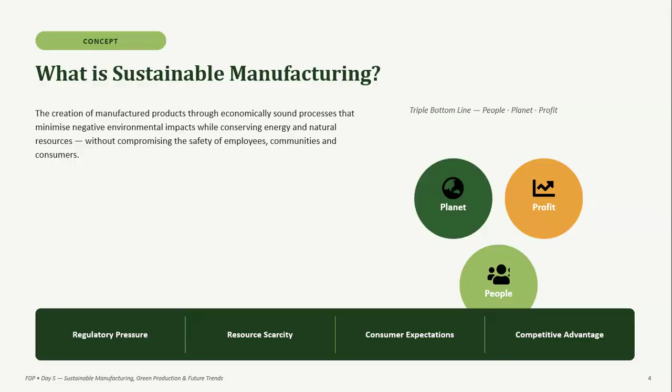Next, following the introduction of sustainable manufacturing, why are sustainability concepts considered to be the most significant important today? Manufacturing contributes significantly to global carbon emissions. However, industries have tremendous opportunities to reduce their environmental footprint. Energy efficient manufacturing processes can reduce energy consumption by nearly 30 to 50%.

Many industries are now adapting environmental sustainability goals initiative and sustainability reporting. Companies increasingly seek engineering graduates with the knowledge of sustainable manufacturing practices. Therefore, sustainability has become an important employability skill.

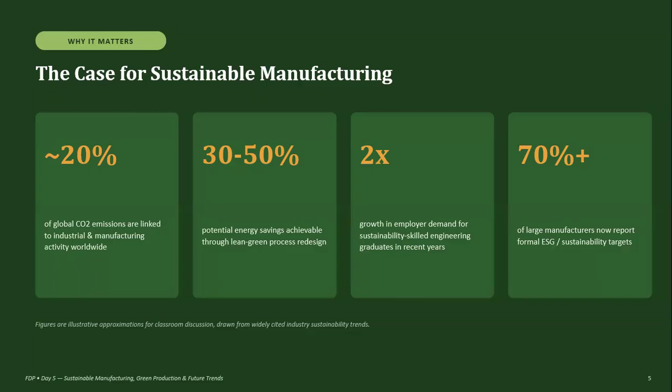The next module, we are going to see the basic introduction about green production. Under green production, we are going to discuss the 6R framework. What is exactly the 6R framework? Now we are going to see one by one: reduce, reuse, recycle, redesign, recover. These are the 6R framework under green production.

Let us discuss the 6R approach under green production. The first one is reduce, which means minimizing the material and energy usage. Reuse involves extending the useful life of products and components. Recycle focuses on recovering valuable materials from waste. Redesign encourages designing products for easier disassembly and improved environmental performance. Recover refers to reclaiming energy or useful materials from waste streams. Finally, remanufacture restores used products to like new condition.

Together, these principles help the industries move forward towards a circular economy. The main concept of the 6R framework is to make use of waste material through recycling without polluting the external environment. From that, we can develop a useful product from the waste material. So this is the main essence of green production: saving the environment.

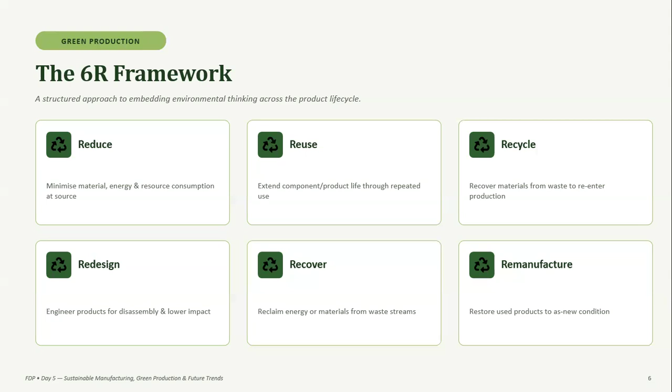What are the various green production tools used in industries? There are several practical tools that support green production. First is lean green manufacturing, which combines waste elimination with environmental sustainability. Renewable energy systems such as solar power reduce dependence on conventional energy fuels. Water conservation techniques include recycling and closed-loop systems. Energy-efficient motors and smart monitoring systems reduce electricity consumption.

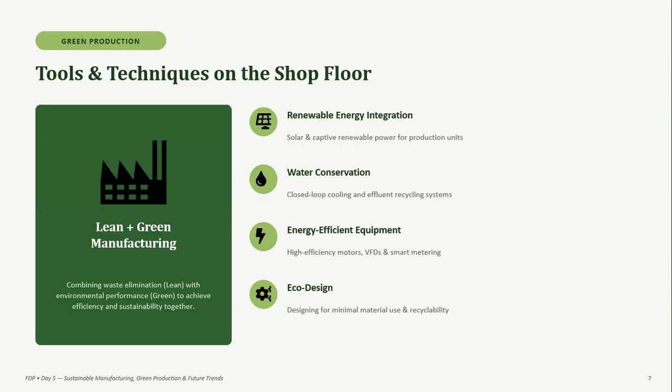Eco-design ensures products use fewer materials and are easy to recycle. These practices improve productivity while reducing environmental impact. So these are the various tools and techniques adapted under green production.

Future trends in manufacturing. Manufacturing has evolved significantly day by day. Let us quickly go through the various industry revolutions, already discussed on day one of the faculty development program. The first industry revolution introduced the concept of mechanization. The second industry revolution enabled mass production through electricity. The third industry revolution brought automation.

The fourth industry revolution introduced smart factories powered by IoT, artificial intelligence, and digital technologies. Today we are in the era of Industry 5.0, which strongly emphasizes human-centric, resilient, and sustainable manufacturing systems. The future is not only about automation, but also about collaboration between humans and intelligent machines.

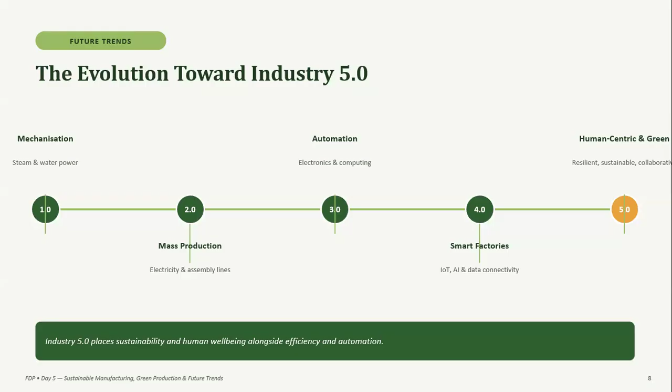The next module, we are going to discuss the various key enabling technologies that support sustainable manufacturing systems. First, artificial intelligence enables predictive quality control and demand forecasting. Industrial Internet of Things provides real-time monitoring of machines and energy consumption. Additive manufacturing reduces material waste by producing components only when required. Collaborative robots improve flexibility and worker safety.

Digital twins simulate manufacturing systems before implementation. Cloud computing and blockchain improve transparency and traceability across supply chains. These technologies are shaping the future in the next industry revolution.

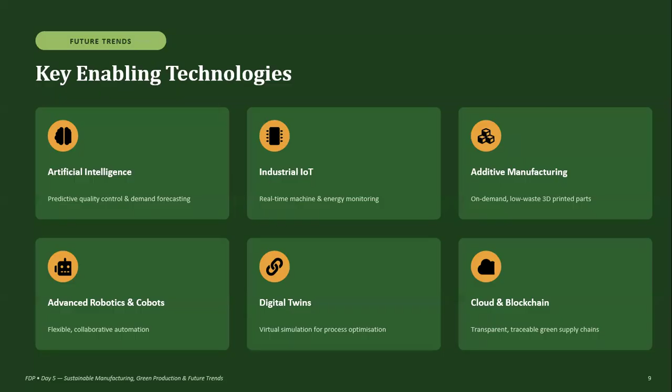Let us now understand the concept of sustainable manufacturing and green production with the use of a case study. Let us examine a practical case study.

Consider a medium-sized automotive component manufacturer that faced rising energy costs, excessive material waste, and increasing environmental requirements from customers. To address these challenges, the company conducted an energy audit.

They adapted a technique called lean green kaizen, which helps reduce waste in various forms. Next, they adapted solar energy systems followed by IoT sensors, which continuously monitor daily energy consumption and emissions coming out from the factories. This integrated approach significantly improved sustainability performance.

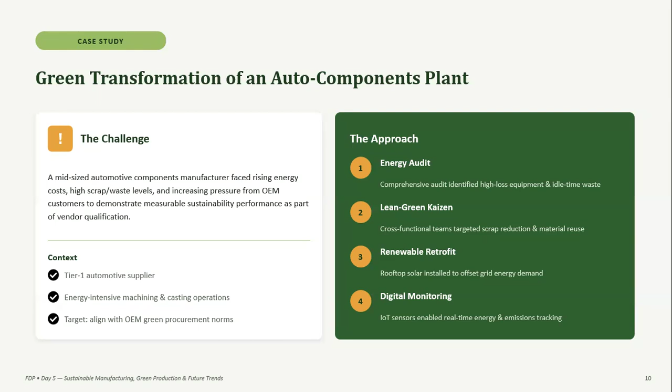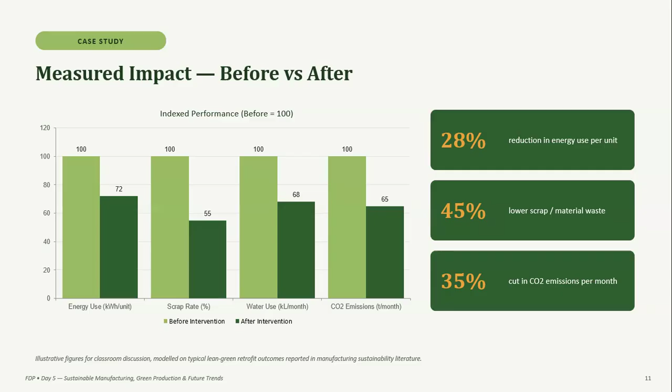Next, in terms of industry demand, I mean placement opportunities. The sustainability sector has created many exciting career opportunities. Graduates can become sustainability engineers, green process engineers, energy auditors or energy analysts, automation engineers, Industry 4.0 specialists, and supply chain sustainability analysts.

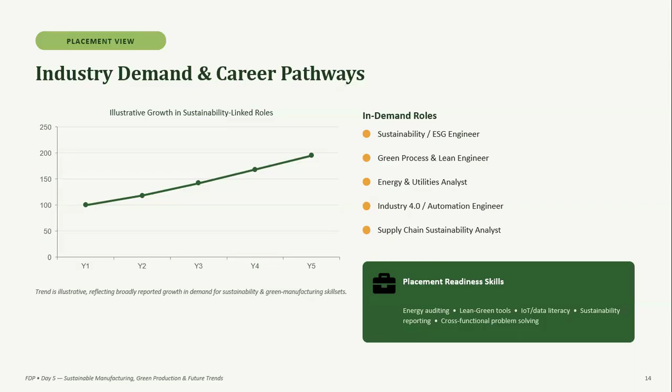Let us now summarize today's learning outcomes. Sustainability manufacturing has become an essential business strategy. The 6R framework provides practical methods for reducing environmental impact. Industry 4.0 and Industry 5.0 technologies accelerate sustainable production. Real world case studies demonstrated measurable improvements in energy efficiency, waste reduction, and carbon emissions. As educators, our responsibility is to prepare students with these future-ready skills.